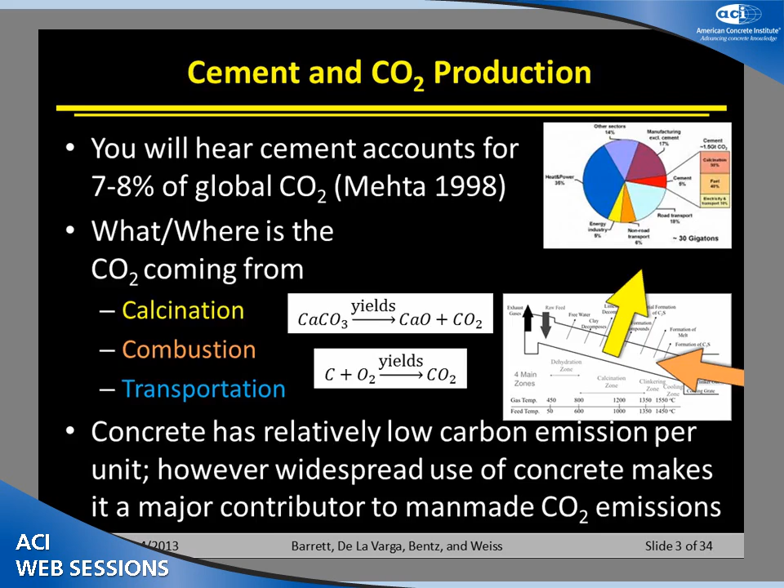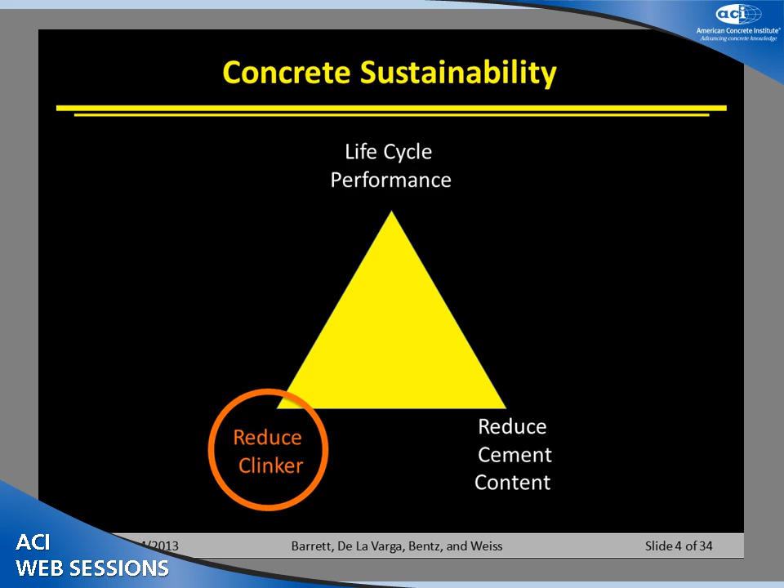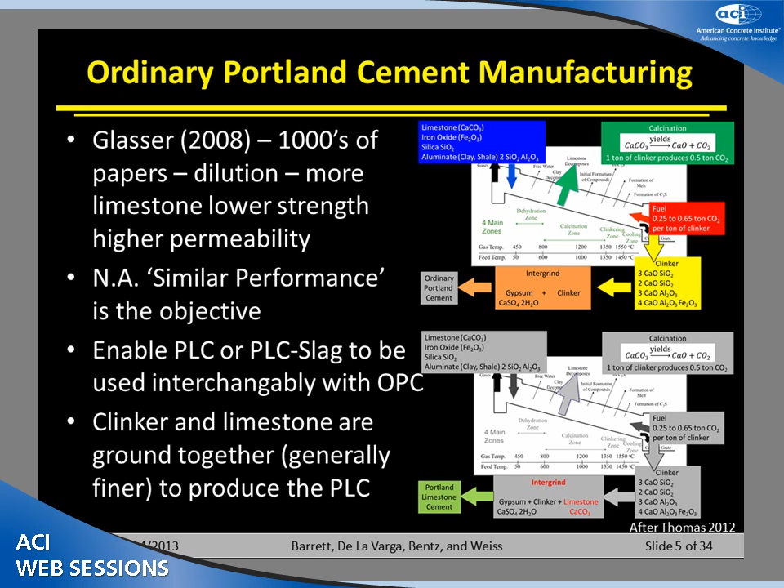Generally, it's interground to be a little bit finer, but as I mentioned, in North America the whole idea with this finer grinding is so that it's completely interchangeable. So you can swap out the OPC you're using, swap in the new PLC, and go on down the road fairly quickly.

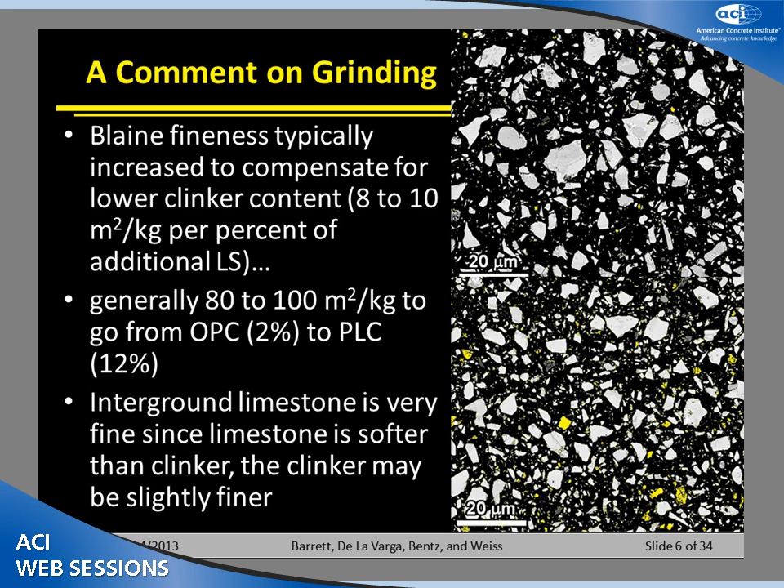Here's just a comparison of the two, and as I mentioned before, it's a slightly finer blend. This is the OPC up here on the top. Down here on the bottom, we see the Portland limestone cement, and you can see the limestone being the yellow particles. The big part of this is the limestone is relatively fine, right? And that's really where the benefit is coming out in these materials.

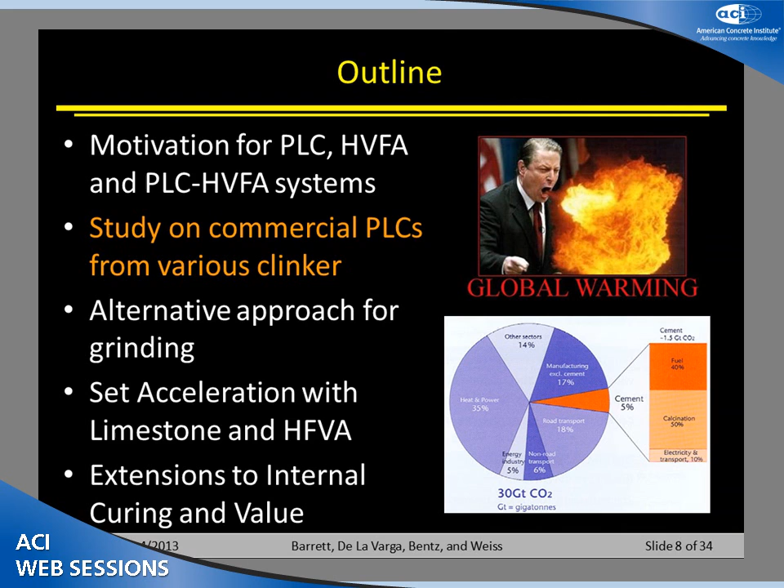Okay, so what I want to do very quickly here is touch base on a study that we've recently been doing for the DOT on commercial Portland limestone cements from a variety of different clinker sources. What I really want to impress upon us is this is a technology that's really ready and can be utilized and implemented relatively quickly.

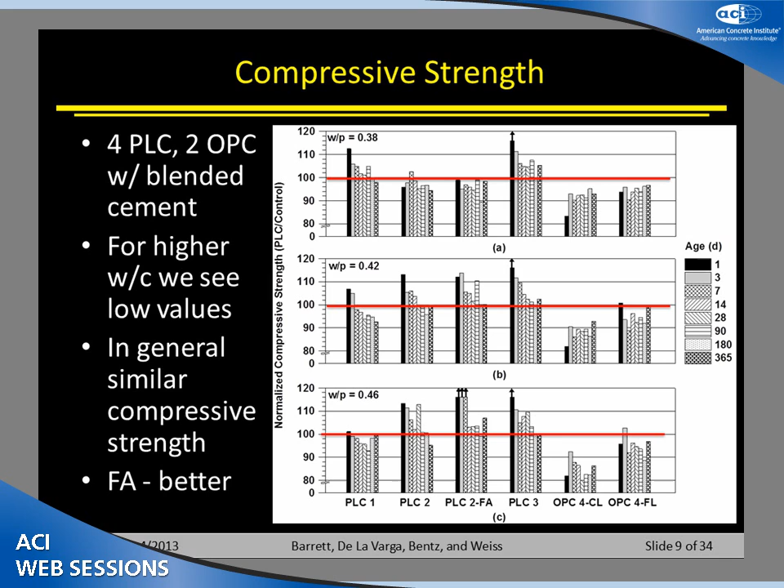When we've got fly ash in the system, we typically see a slight increase or kick up in performance. The last 2 columns we look at are, instead of an equivalent system, when we're adding limestone to the system, just adding it, not intergrinding it. Typically we see that dilution effect we talked about before, where when we replace 10% of the cement with limestone, the properties drop so that we get 85 or 90% of the overall strength.

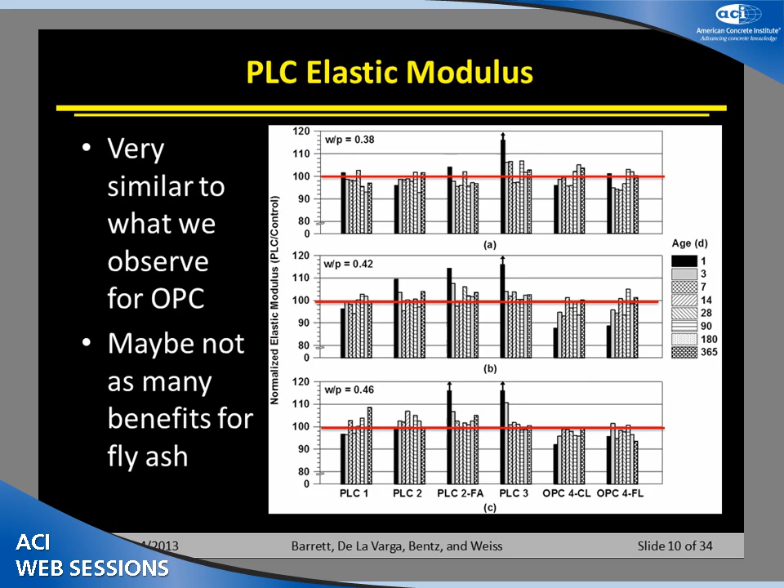Similar benefits can be seen, or similar types of trends can be seen when we look at the elastic modulus. Again, 100% value means the Portland limestone cement system is equivalent to the OPC system. Again, across the board, we see very similar observations.

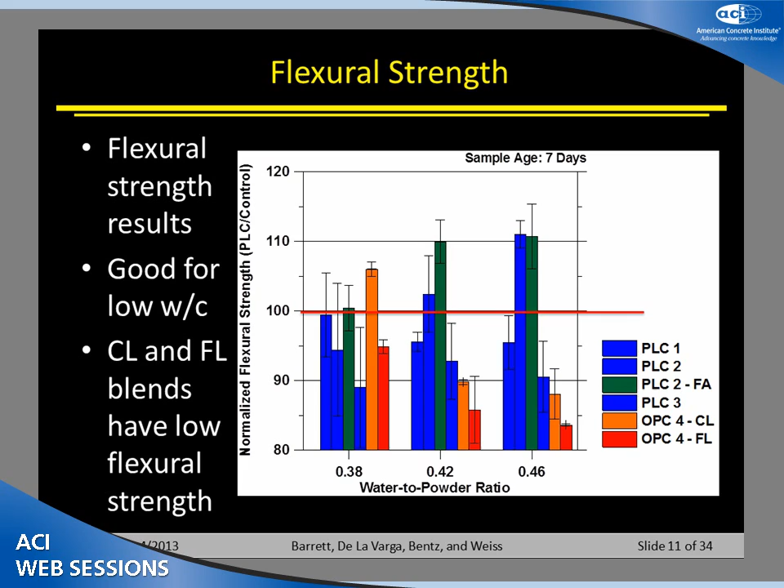In general, the performance is very similar. Again, the orange and the red show the effect of dilution when you're just adding the limestone into the system and not taking advantage of those finer particles.

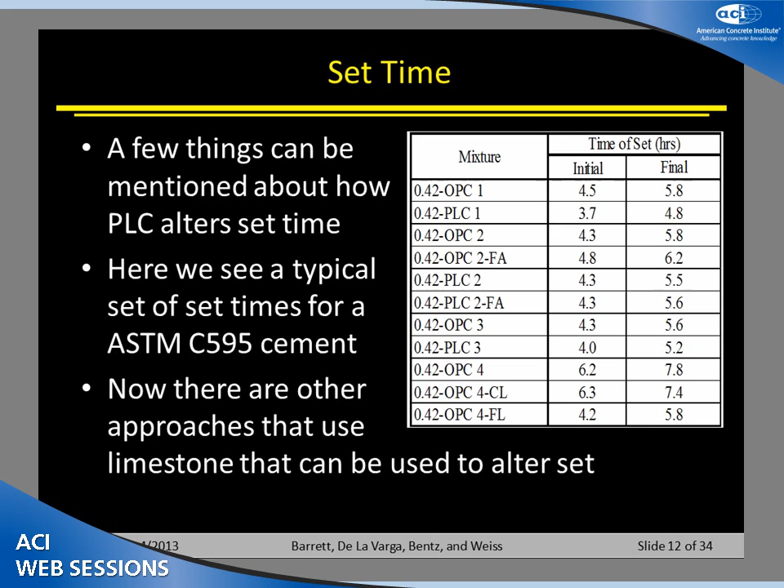Similar set times, and this will go against a little bit of what I'm going to point out later, but I wanted to put this in as a placeholder: when you're using the PLC system, you have a very similar set time to what you see with the OPC system. I'm putting this in because it's going to contrast a little bit with what I'll show later on.

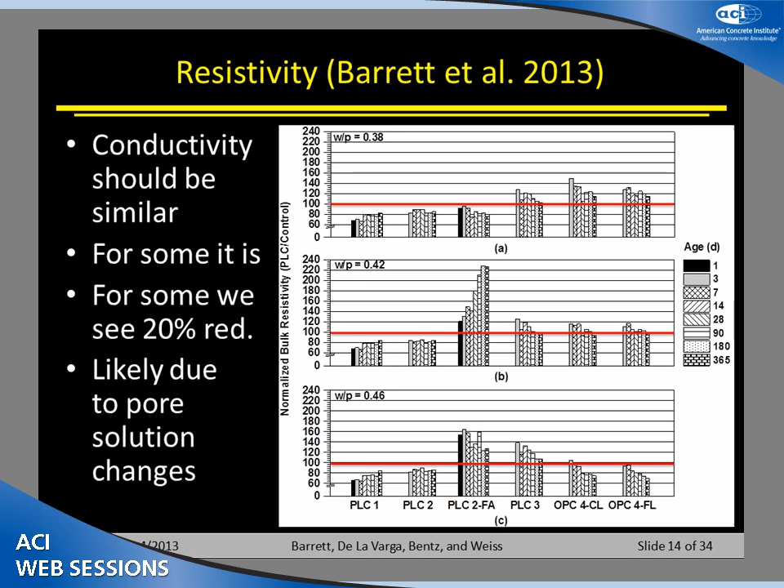Transport properties: if we're just counting on dilution, we see a little bit of an increase, but for most of the systems, we see a behavior in electrical properties that's relatively equivalent. We see a slight decrease here, and we think this is due to a pore solution change with the electrical properties, and that's something we're still looking at because the chloride ingress numbers are very, very similar.

So really the takeaway from the PLC systems, the inter-ground systems: we see a finer grind results in similar strength. They're always within 95% of the parent material. Very similar modulus, very similar flexural strength.

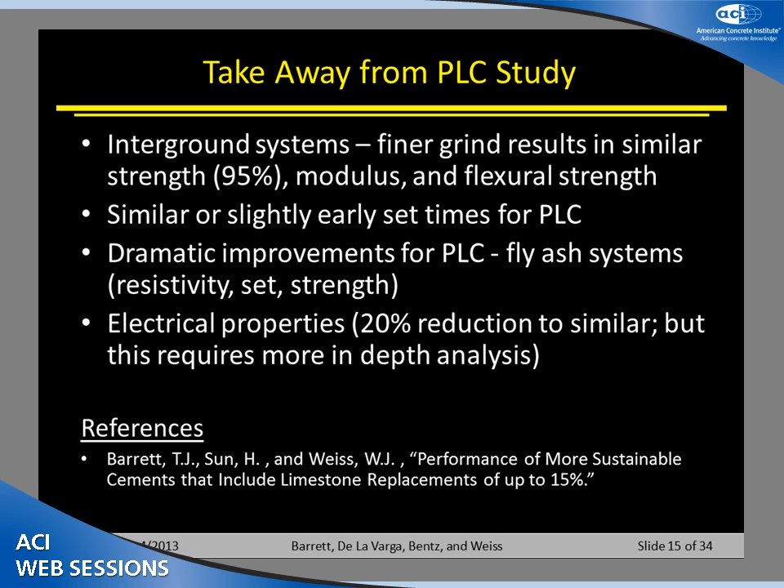We see similar or slightly earlier set times as compared to the OPC when looking at the PLC systems. And then for electrical properties, as I mentioned, on some systems, depending upon the chemistry, we can see a slight decrease in the electrical properties, but we see very similar chloride ingress in those particular materials.

Now I want to jump into some different ways we've been looking at fly ash and limestone systems, and one of these is an alternative approach to grinding. There was a discussion earlier about whether we can start reclaiming certain materials and do other things to use some of these different fly ashes.

One of the things we've been looking at is the approach of using this device over here, called the jet mill. The basic idea is we drop the material in, get it moving in an airstream, and collide it with itself. When it collides with itself, it breaks up into smaller particles.

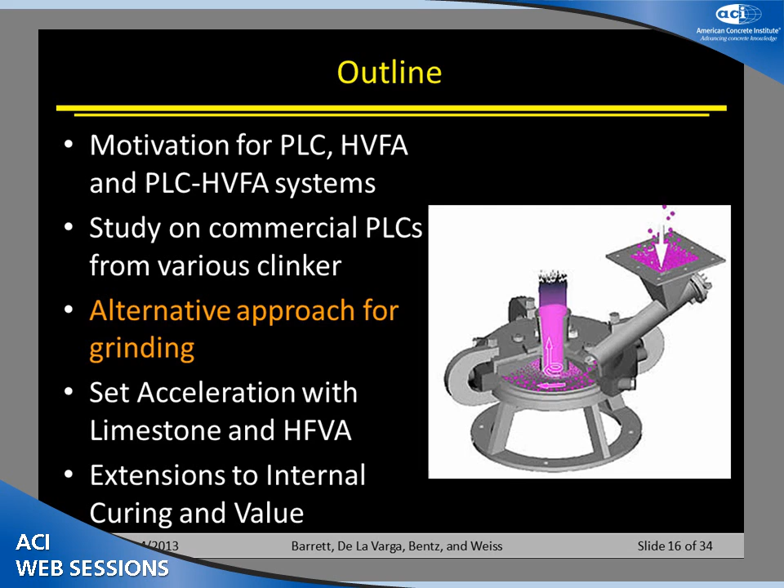This is a technology we've been looking at to see if we can reactivate some materials that are out there, or make very, very fine particles that could be very useful.

So we've been doing this at pilot scale evaluations. You can do this on a tabletop unit, but we've been doing 200-300 pounds at a time in a commercial process, though there are groups that do this for ceramic materials that process tons of material every hour. So this is something that can be scaled up relatively easily.

After about 2 to 3 passes, we can get down to a material in the 1 to 2 micron range of particle size, and continued collisions don't really get the material any smaller than that. This is probably a very active material, which we'll see from some of the data shown later.

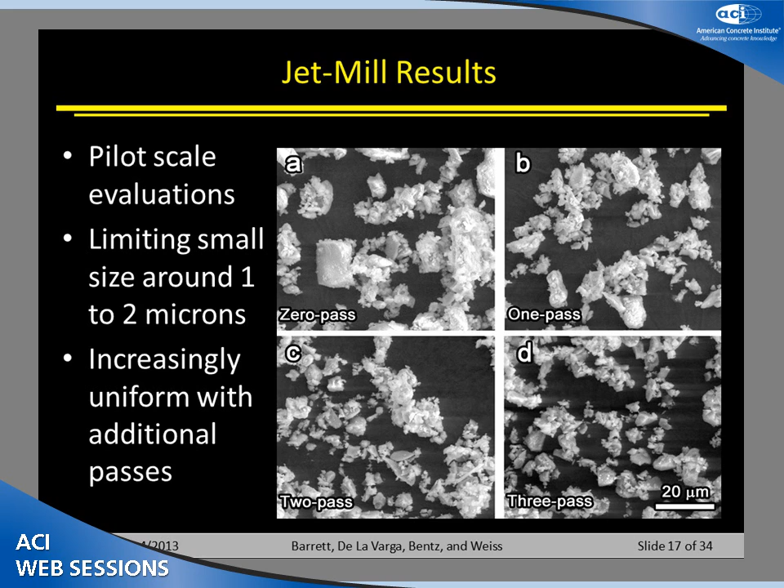So with the original material we started out, after 1 pass, 2 passes, 3 passes, we can greatly reduce the size of the particles, and this can have a great impact on the reactivity of those materials.

To showcase that a little bit, what I've shown here is the cumulative heat released in those materials. This is a measurement of isothermal calorimetry, essentially a rate of reaction. Here we can see the black line.

The black line is the conventional cement system, cement plus 15% limestone, shown here in blue. If we do separate grinding of those materials, we essentially increase or accelerate the reaction and get more reaction happening. But if we inter-grind the materials, we get even faster and higher heats of hydration going on in those materials.

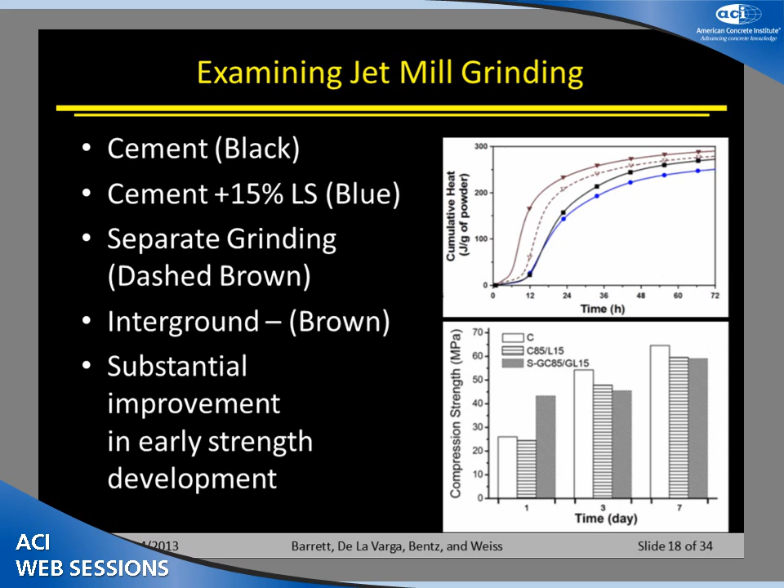By intergrinding, just like we see in a ball mill or other technologies, the limestone gets preferentially smaller than the clinker, and we can see some real benefits there. The benefits really come at early ages, and that's very important for a lot of these higher volume fly ash systems.

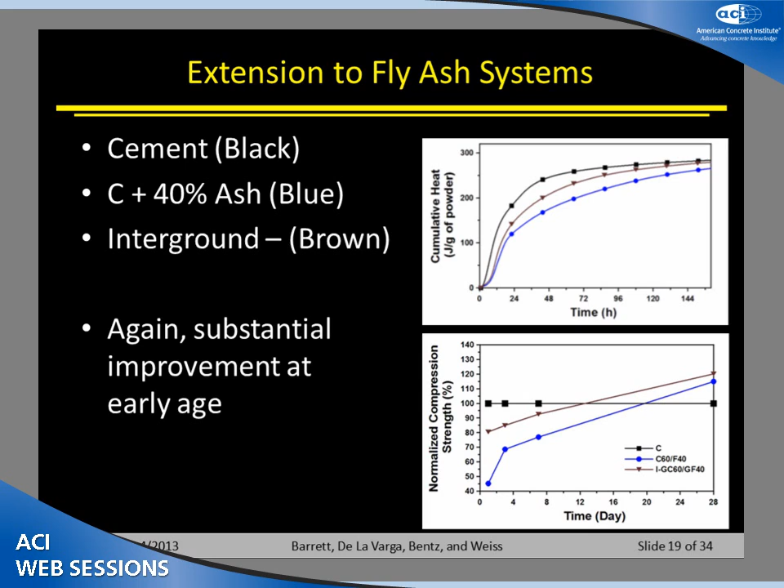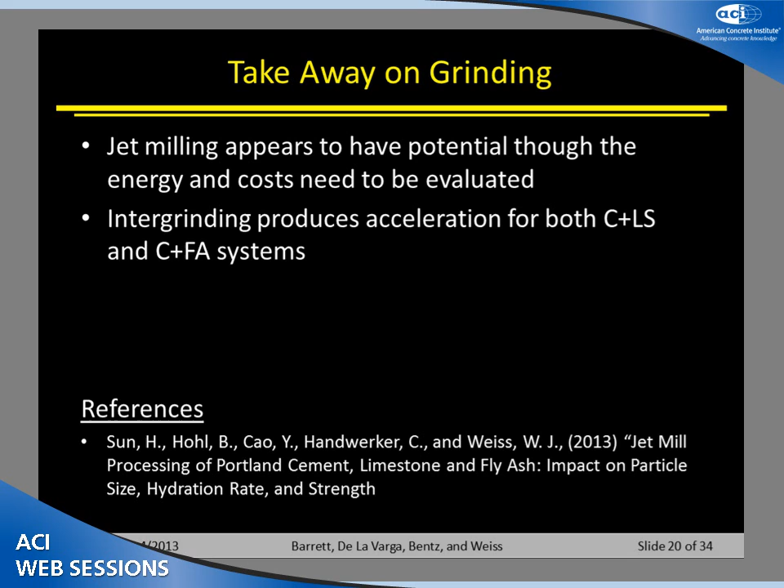So the jet mill appears to have some potential promise, although we need to look more at the energy and costs and what it takes to scale that up. But the real benefit of intergrinding is we can accelerate both limestone and fly ash, and there's potential to reclaim some of that ash that's been ponded, because we can get it reactivated by crushing it and getting that material to come out.

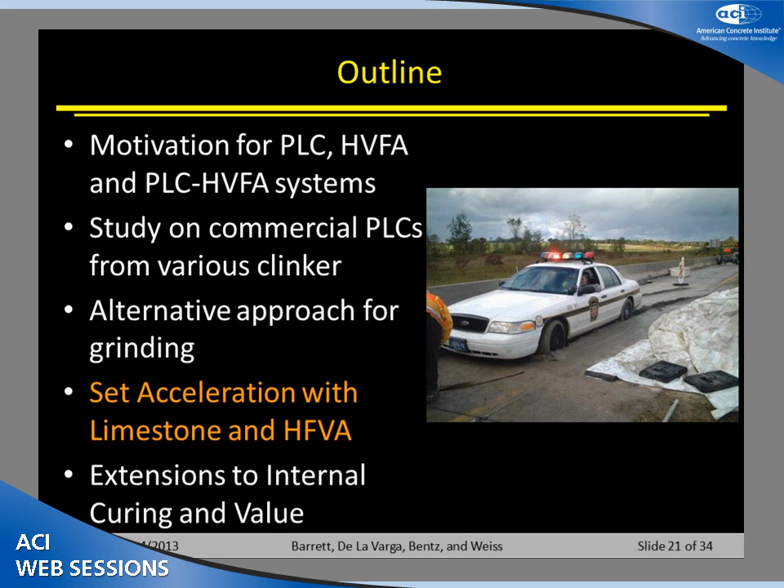The other thing we've looked at, in some work done with NIST, is set acceleration with limestone and fly ashes. One of the things we looked at when considering high volume fly ashes was the potential concerns: we'd like to use higher amounts of fly ash, but we don't know when it's going to set, and it's going to have slow strength development at early ages. So that's some of what's gone into this work.

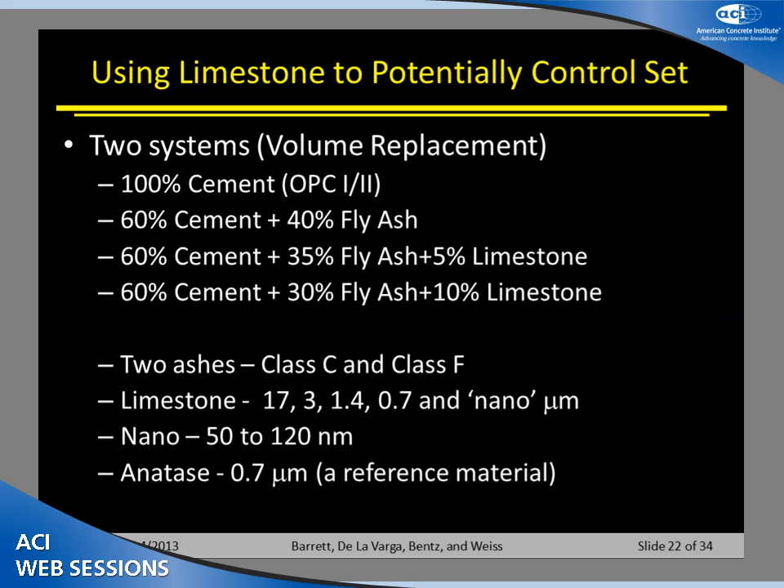Looking at a couple different systems, we've done a volumetric replacement. The baseline system is 100% cement, and we've looked at replacing 40% of the cement by volume with fly ash and 10% limestone. We've been looking at different size limestones from about 17 microns all the way down to a nano particle, in the 50 to 120 nanometer range, to see the benefits of this.

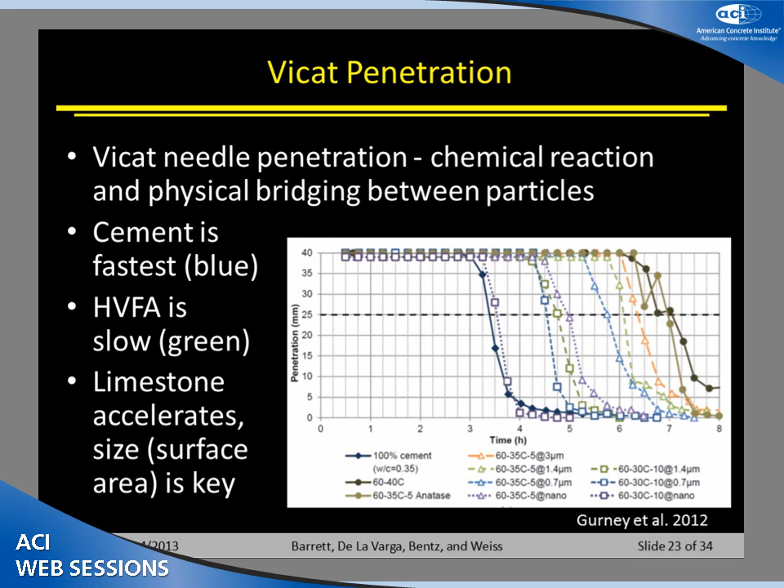If we start adding limestone into that system, we can see this moves back over to this position. If we plot some of this data differently, we see similar trends with calorimetry. And if we plot it a bit differently, based on the surface area and size of the limestone being added, we can actually control when that set time would be.

So if we use finer limestone powders, we can get back to a set time that's more compatible with conventional processing. What you can see here is that using 5% or 10% very fine limestone, it's possible to get back to something equivalent to that 100% OPC system in terms of setting. We can now overcome some of those delays in set by combining limestone and fly ash, because of the beneficial effect of the limestone reaction, but also the fine particles leading to some nucleation.

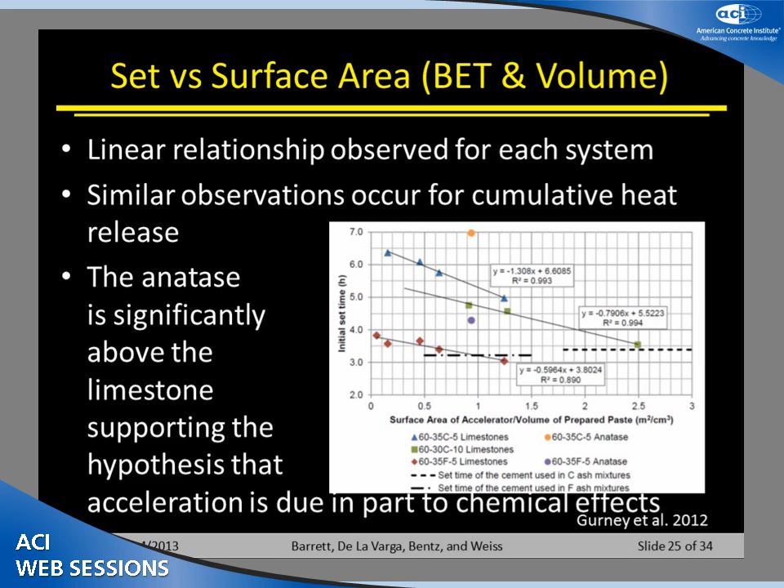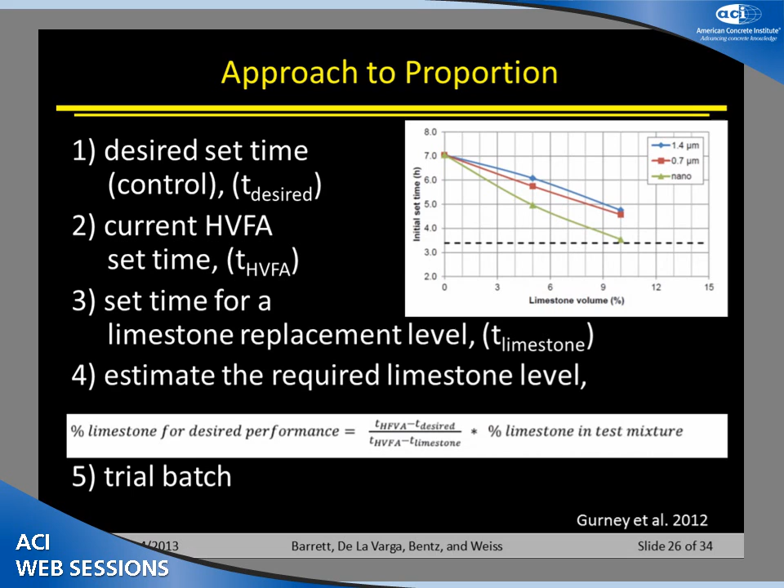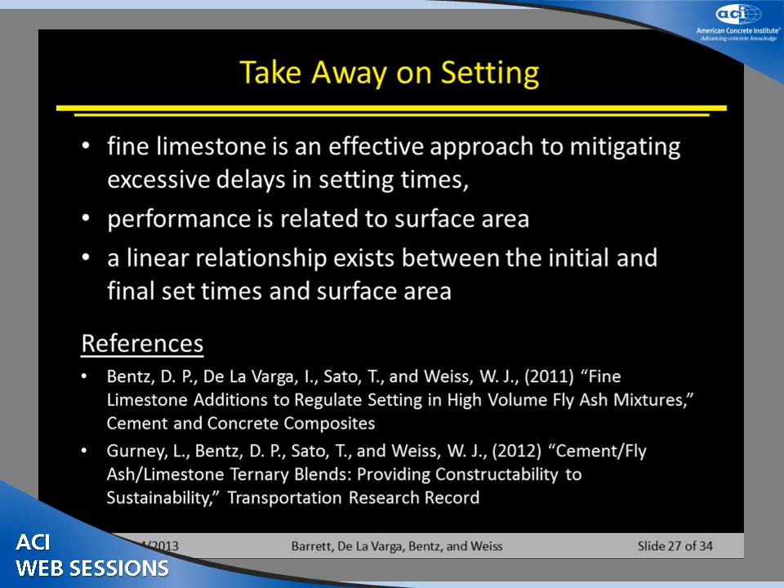And then you can essentially develop a linear relationship between the particle surface area, the particle size, and the set time. There's a couple different approaches that have looked at this.

The final thing that we want to talk about here is really an approach that we're looking at to try to extend the use of high volume fly ash by combining it with internal curing.

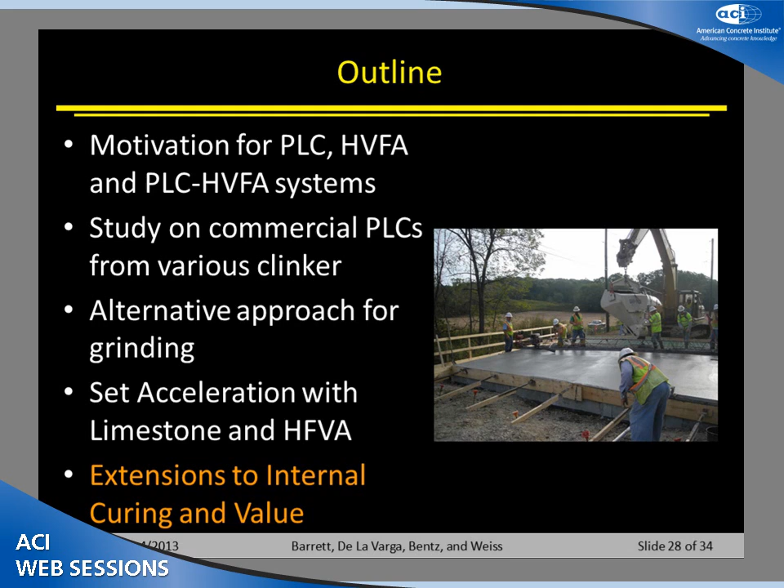So this is a particular deck. Now this is not a high volume fly ash deck, but this is a particular deck with internal curing. If you haven't seen internal curing before, this may sound like a different topic. Conventionally we have concrete up here, and I would hope, as I mentioned earlier, that we would be minimizing the paste content, with a bit more aggregate than what I've shown here with these dark aggregates in the system. But the basic idea is we do external curing in a lot of our applications.

We put water on top of the surface, or we put a film on top of the surface, but in a really dense concrete, this water can only penetrate so far into the material. The approach we're trying to use is instead of essentially just providing water from the surface, we can hide water inside of porous inclusions.

We can hide water inside of the aggregates, and when that water is needed, it can be drawn out of lightweight aggregates, hydrate the system, and provide some of the beneficial components we would want to see here. So the idea is when water is needed, it's pulled out of the lightweight aggregates and is available throughout the cross-section to hydrate the overall cement.

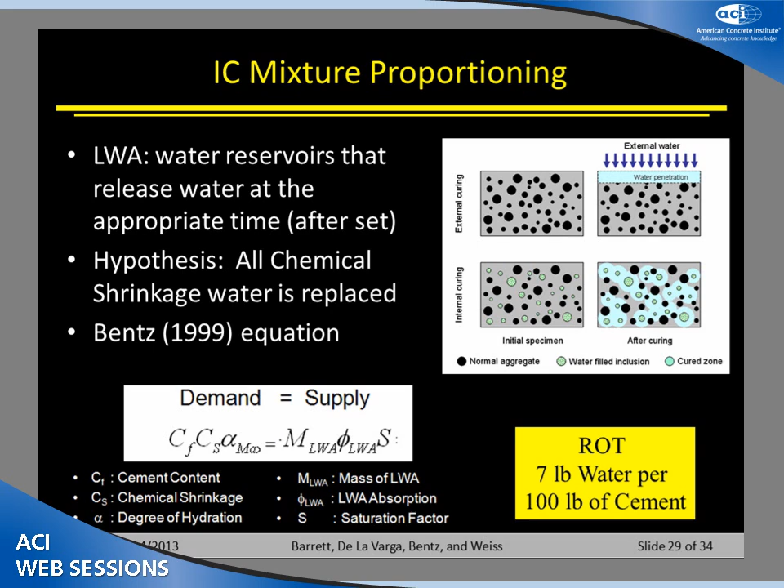There's a quick calculation you can do to figure out how much water you need. It turns out you need about 7 pounds of water for every 100 pounds of cementitious materials in the overall system.

Now, what are some of the benefits of this? Well, one of the real benefits is you are providing longer times for curing, and especially when you start to look at fly ash, that water is sticking around longer inside the system.

When we conventionally do ponding of water on top of the slabs, there's a big pressure to keep people there watering the slabs, keep watering the slabs. And we know when we've got things like fly ash, we have to stay there for a lot longer period of time.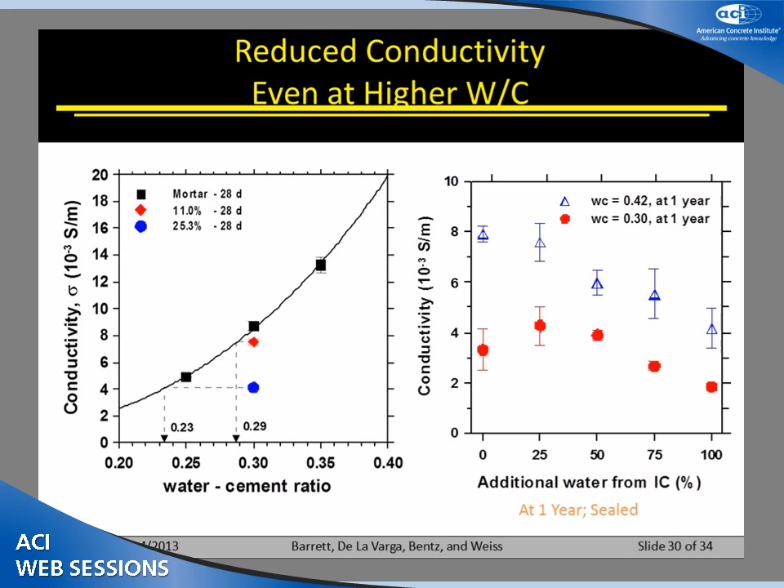You may say, well, I still don't care if it's 8 or 4 or anything else. This number is directly related to the speed at which ions move through your concrete. If you drop that number in half, the ions are moving half as fast, and it's going to take them twice as long to get to the reinforcing bar. So you're hydrating more of the system—very important when you've got fly ash in the system, and this comes from densifying the overall material.

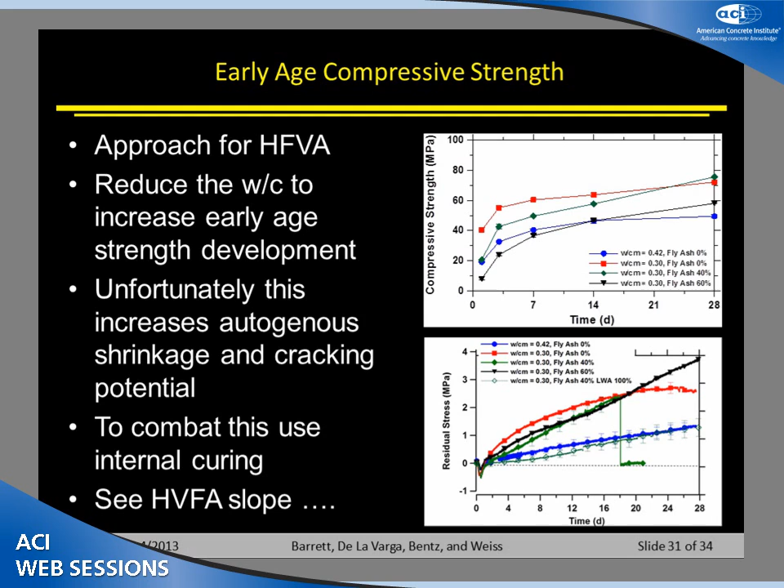However, if you use the high volume fly ash with the internal curing, you can substantially reduce that shrinkage that's taking place and drop back down to a very similar level of stress development inside the deck. So now you've got a 0.3 water to cement ratio system. You've substantially reduced the transport properties, and you've substantially reduced the shrinkage and cracking potential inside of those mixtures.

And the reason for this is shown on this plot up here. This is just the heat that's given off, which is a measure of how much material is reacted versus water to cement ratio. Sealed system, internally cured system at 3 days, you're getting about 5 to 10% more of the material reacting because you're supplying water to the system. This gap gets bigger and bigger over time, and gets bigger over time when you've got more things like supplementary materials in the system. So keeping water in the system, keeping the system hydrated, does exactly what we're taught in Concrete 101, keep curing the concrete, but we're curing it from the inside out.

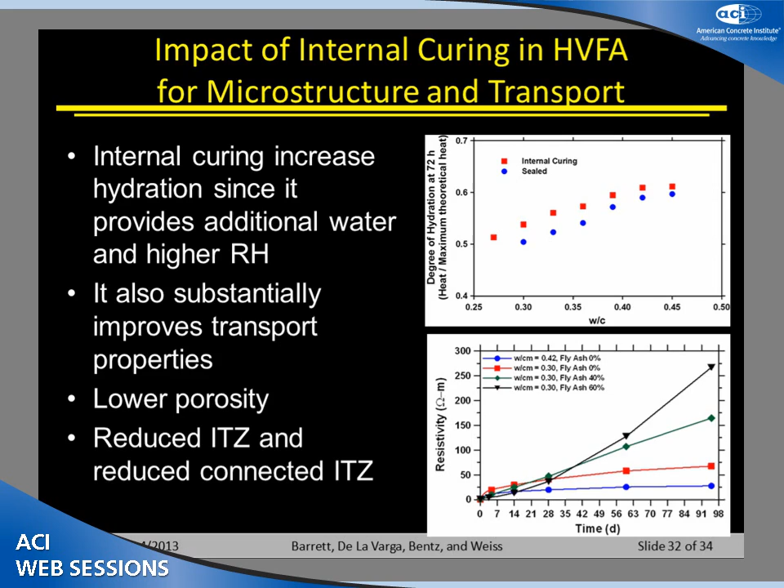The other benefit to this is because we've reduced the water to cement ratio, because we've provided that additional curing, we can see substantial changes in the electrical properties, which mean we've made the system much more dense and much harder to start corroding the overall concrete. So internal curing has a lot of advantages. We can reduce the cracking potential, we can improve the hydration, we can reduce the transport, and one of the other things that I'll mention here very quickly, and I haven't had time to go through it in great detail, but it improves construction robustness because now we're less susceptible to things like thermal shock in the system.

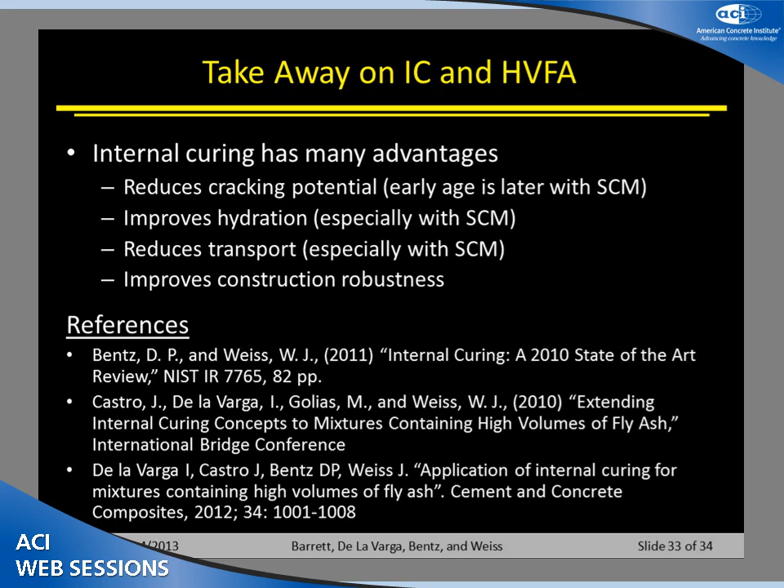One of the other takeaways, and I'll throw this out as a little taster here. It was discussed before, you can have a lot of problems with air entrainers. We've made these high volume fly ash mixtures at a 0.3 water to cement ratio. We put them through freeze thaw testing. Because the water to cement ratio is so low, we don't see freeze thaw damage in those systems. We can't get water into the systems. We can't get them saturated because they're very dense.

So in summary, some of the motivation, really the idea is to reduce the clinker. It helps to reduce the CO2 production. We've shown commercial PLCs from a variety of clinkers, similar set, similar strength, and really the whole idea here is they're at a point where they're really able to be a direct substitution for an ordinary Portland cement. An alternative approach for grinding, jet mill grinding is a technology that we're really looking at. By grinding it increases the reactivity so we can really accelerate the hydration of these materials and maybe reclaim materials that are already sitting on the ground.

Set acceleration with limestone, so we can offset some of the slow strength development in high volume fly ash mixes with fine limestones. And then we can use internal curing as a way to help offset some of the slow strength development by changing our water to cement ratio, but then we can account for the increased autogenous shrinkage, we can improve the curing, and we can reduce things like chloride ingress in those systems.